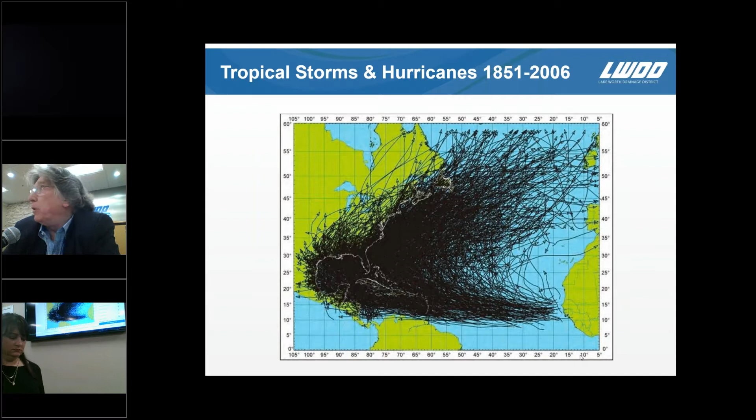The physical development of a hurricane is kind of important to understand. Hurricanes are more complicated than they appear on the radar that we see in our weather reports and on computers, etc. Hurricanes have 4 main parts that make up the physical composition: we have the eye, which is right in the center, you're all familiar with that; the eye wall, which is the band right around the eye; the rain bands that are associated with the larger structure of the system; and then the overlying cloud cover.

As air rushes around, like on a pinwheel or a carousel, not unlike water going down a drain, at the same time it's moving around, the air is moving inward toward the eye of the storm. The winds come in at the bottom, and then at the eye it acts like a chimney, and the air goes up the chimney to the upper troposphere.

That portion of the hurricane is critical to the wind speed. If you've got a well-formed eye, you have a well-formed chimney. And if that air can get into the eye and move up, the system is going to spin faster, and then you're going to have increased winds that we'll talk about in the categorization of these storms. When you have upper level winds that sort of blow the top off the chimney, it's harder for these systems to generate. So whenever you hear the weathermen talk about upper level winds, that has a dampening effect in some cases on a hurricane.

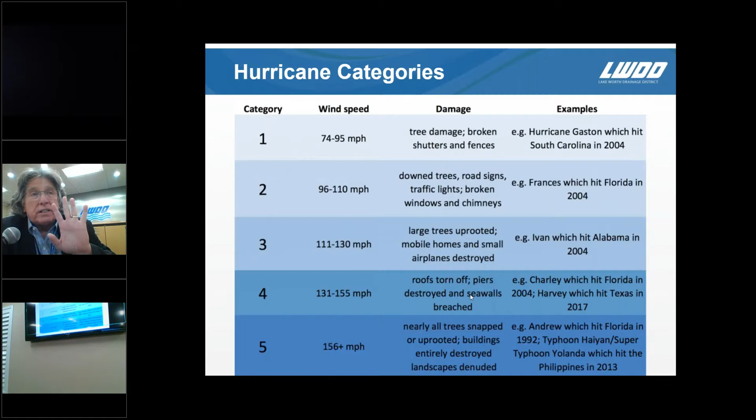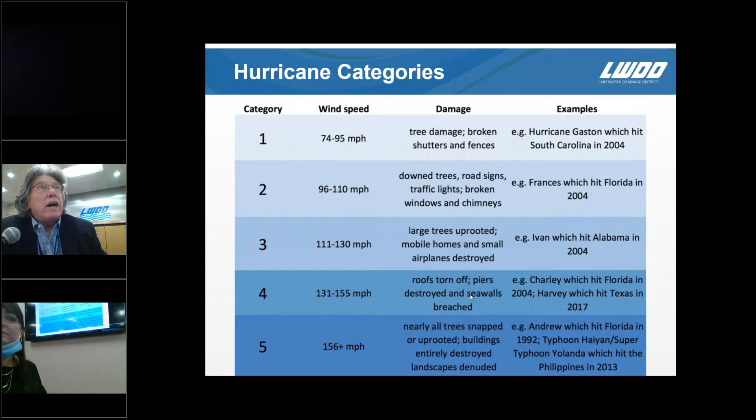But this category really just affects wind speed. There are no categories or identification of severity of rainfall, because you can have a tropical storm that drops excessive amounts of rain because it's slow moving, versus a category 5, which may drop an equivalent amount of rain, but it's moving very fast. So a lot of those factors play into what we deal with as water management.

The 2019 Atlantic hurricane season was a very busy season. There were 18 storms named, 6 were hurricanes, and 3 of those were major hurricanes. Hurricane Dorian impacted the Bahamas, Humberto impacted Bermuda, and Lorenzo impacted the Azores. 6 tropical storms affected the U.S., including Dorian and Barry as hurricanes.

And this is the point I like to make: regardless of the activity of the season that is forecast, we have to pay attention whether it's an active year or inactive year. I'll give you 2 examples of that.

If you remember back in 1992, Hurricane Andrew hit southern Miami-Dade County. Devastating damage occurred from that storm. It was one of 3 storms that formed that year. So the year that we were hit by the worst storm in Florida's history was one of the least active years that we had.

And you've probably seen in recent history where we've had 20, or in 2019, 18 named storms, and really weren't very much affected by those. So regardless of the forecast activity, we really need to pay attention to the hurricane season and realize that we can be hit literally any year.

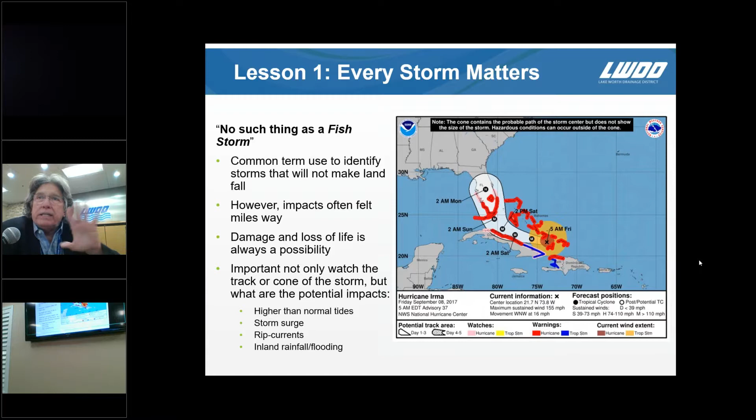In history, we've had storms where the eye of the storm went in at Key West, but the majority of the rain fell in Palm Beach County. So even at great distances, we can still be significantly affected.

Hurricane Dorian was a Cat 5 that killed 70 people in the Bahamas, 60 people on Abaco, and 10 people in Grand Bahama. And the second deadliest storm in 2019 was Lorenzo.

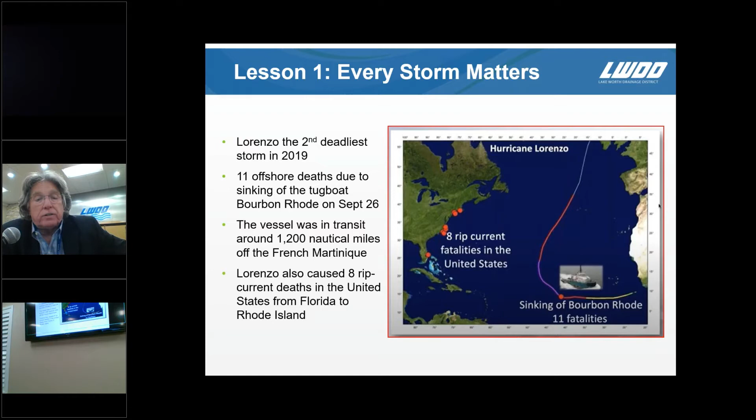It was a Cat 5, and it was one of those storms referred to as a fish storm, but it killed over 19 people. There were 11 offshore deaths due to the sinking of a tugboat that was out in the Atlantic near the Azores. The vessel was about 1,200 miles off of French Martinique. And Lorenzo caused 8 rip current deaths in the United States between Florida and Rhode Island.

It's important not to fixate on any one of those, but to recognize that there's a lot of uncertainty and variability that the professionals, weather forecasters at the National Hurricane Center, are dealing with. They look at each one of these models in great detail. They understand where the models have their strong points, where models may have their weak points, and that factors into their decision as to which model to follow.

Obviously, we don't have that expertise. We rely on the Weather Center to sort through the scores, but it's good to have this information available to us in real time that we can look to and see the uncertainty facing the Hurricane Center forecasters. This is a graph that shows the improvement in forecasts from the 1960s to today.

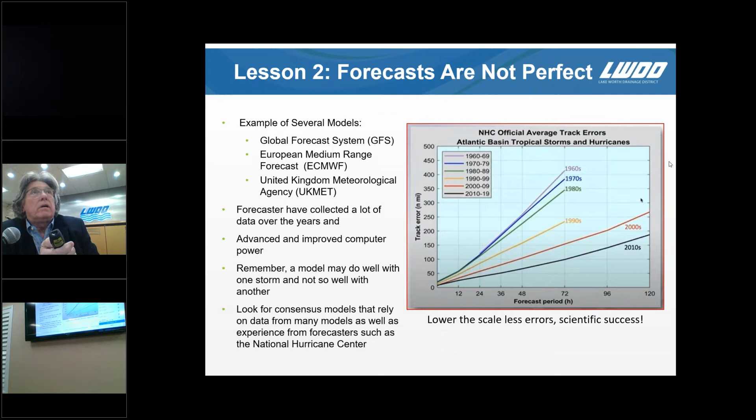Oops. Right, this is not working. Try it now. There we go.

The other thing to point out and understand is that even though hurricanes have an eye, and on a map that's a very fine point, and certainly we're concerned about where that makes landfall or how it affects us, in these forecasts made by the National Hurricane Center, they're showing us this cone of probable impact, which says the eye can be anywhere within this area and still be within the forecast made by the National Hurricane Center.

Hurricanes can cause wind damage far outside of this cone as well, so you're not held harmless if you happen to fall outside of the cone at any one time. We need to stay vigilant, even if our area turns out to be just outside the cone. A small deviation within the cone can significantly change the impacts to the surrounding area. And as we talked about earlier, damage is measured not just by the category, but by the physical size of the storm, the speed of the storm, and when it can make landfall with regard to tides.

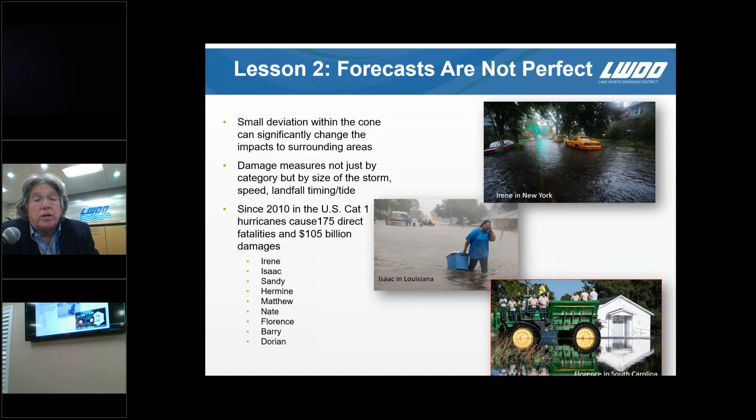Since 2010, U.S. Category 1 hurricanes caused 175 direct fatalities and over $100 billion in damages.

Social science matters. We tend to forget bad experiences, experiences that particularly influence people's future decisions. A lot of times, from past experience, people think well, the hurricane wasn't that bad, the last one that is. And there's a tendency for us to dismiss or diminish the potential risk because we haven't been impacted before.

If we focus on the category too much, we can lure ourselves into a false sense of security - that's only a Category 1. Well, it doesn't mean you're going to avoid flooding damages, and you can still have wind generated damages from trees that fall over in a Category 1. We had a tropical storm a few years ago on our rights of way, and we had 75 trees fall from what was literally the winds from a tropical storm. So we always have to pay attention to these systems, regardless of the strength.

We need to communicate often and use effectively multiple communication platforms, whether they be social media, print, email, or face-to-face, or telephone conversations, or meetings like this. We definitely need to communicate, because every storm presents a different spectrum of risk, and it's good that we're talking and communicating to best understand.

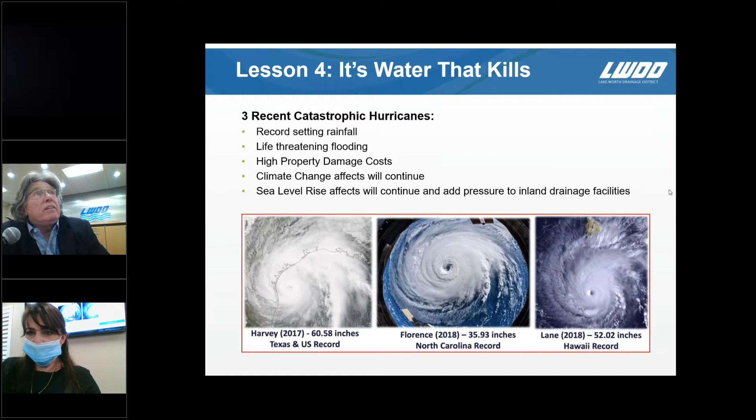Another lesson, it's water that kills - 3 recent catastrophic hurricanes had record-setting rainfall, life-threatening flooding, high property damage, and climate effects will continue to impact us in hurricane seasons, whether through more hurricanes in number, or whether they're just more intense with regard to wind and rainfall. And as sea level rise continues, it adds pressure to inland drainage facilities, both along the coast and well inland. We can get into details about those later.

Oh, there we go. Go ahead. There we go, there we go.

Another lesson is the storm's timeline, and it's the old saying, it's not over till it's over. There are a lot of injuries that occur after the storm has passed, when people are starting to get out and move around. That's particularly true if there are a lot of flooded streets, and we'll talk some more about that in a minute.

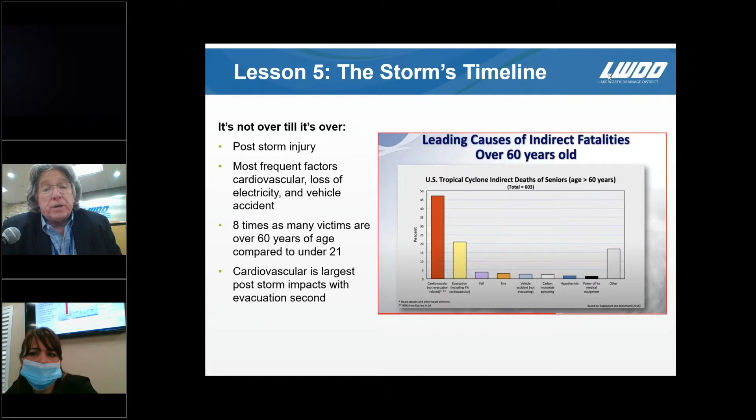The most frequent factors in the loss of life are cardiovascular issues, loss of electricity, or motor vehicle accidents. There are 8 times as many victims over 60 years of age compared to under 21. Cardiovascular deaths are the largest associated with that.

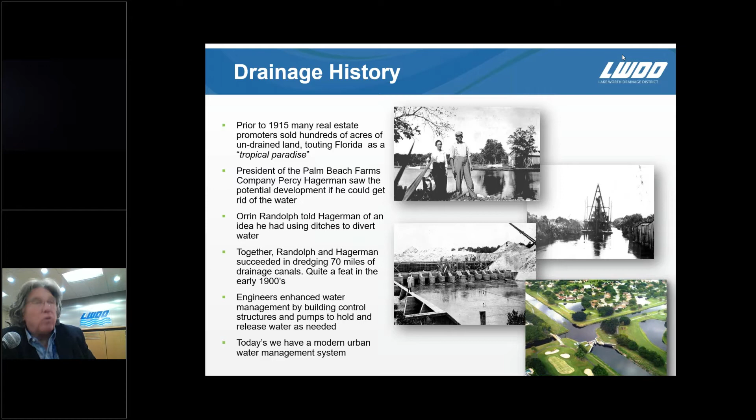One of the biggest changes after the 1915 dredgings was the Clean Water Act of 1972, which put in place federal, state, and local requirements for dealing with stormwater. Prior to that, stormwater discharge was unregulated—you could discharge at any rate, any quality. There were no retention or detention systems like the internal lakes and ponds we see today for stormwater quantity and quality. Flood protection, for the most part, was via swales, ditches, or just local ponding on undeveloped land.

The Clean Water Act, through permitting, regulates the discharge of pollutants into the water from point and non-point sources—whether it's coming out of a pipe or flowing overland, like in the top photograph, from one parcel into another. The Clean Water Act regulates the movement of pollutants through these sources with the goal of ensuring surface water meets standards necessary for human water consumption, sports, and recreation.

It affects the way community systems are designed, because while the purpose of the Clean Water Act is to deal with water quality, they recognized they had to consider flood control in that overall goal. So they integrated flood control aspects into the regulations that address water quality. Since the 1970s, development standards for drainage systems have been regulated to ensure flood protection and water quality, so developments constructed since then meet those standards with very specific requirements for drainage and flood control.

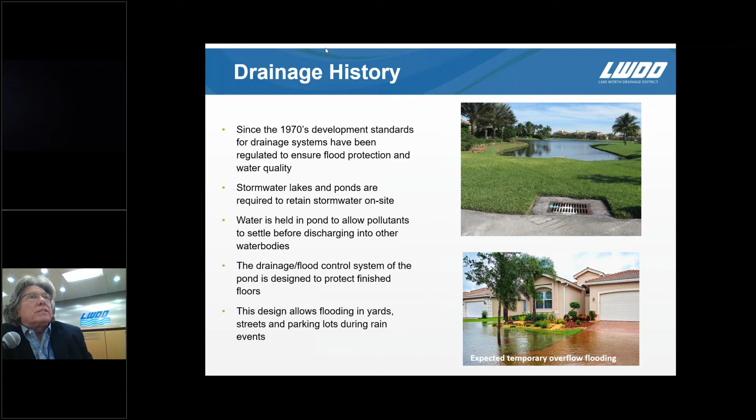As part of that effort, we have a three-tiered system, and each tier has to work well and in coordination with the others in order to function. The South Florida Water Management District manages the regional tier; entities like Lake Worth Drainage District or Palm Beach County generally handle the second tier; and residential communities or businesses are responsible for drainage on their own property. This coordinated effort is needed to ensure stormwater is discharged at the proper rate and time for flood control, while retaining as much water as possible for conservation, water quality, and other environmental reasons.

To compare the system to something similar, our drainage system functions a lot like a roadway system—you have the major interstates, like I-95 or the Turnpike.

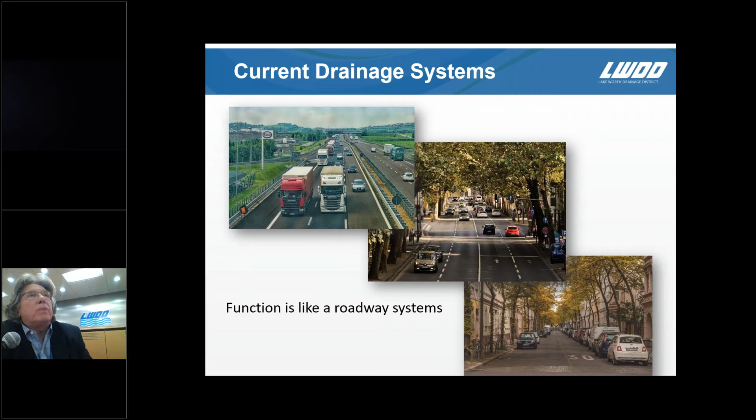They're managed by the state of Florida, and in many cases, like I-95, they're constructed by the federal government. The secondary system is constructed by local entities like Lake Worth Drainage District, Palm Beach County. And then the third part of the system are the local communities where you construct and maintain your internal roadways, and you have similar responsibility for your internal drainage system.

So as I mentioned, Tier 1 is kind of a state-federal partnership to deal with flooding, particularly in South Florida. South Florida Water Management District is one of 5 water management districts statewide. They're a regional governmental agency that manage water resources over the southern part of the state, and it covers 16 counties from Orlando to the Florida Keys with a population of almost 9 million residents.

It operates a complex regional flood control system that has over 2,000 miles of canals and levees, 600 water control structures, hundreds and hundreds of culverts, and over 70 stormwater pumping stations, which is an enormous amount of horsepower when you compare it to other parts of the state or even the country.

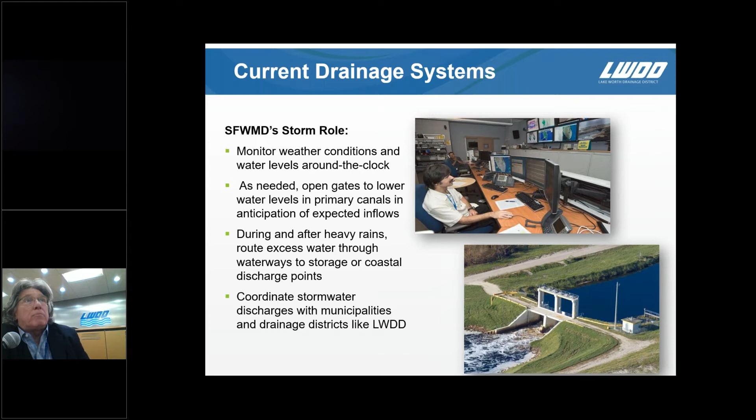During and after heavy rains, they route excess water through waterways to storage or coastal discharge points, and they coordinate stormwater discharges with municipalities and drainage districts like us, Lake Worth Drainage District. I can tell you personally, on a typical heavy rain event, not necessarily hurricanes or tropical storms, but just 6 to 8 inches of rain, I'm generally on the phone with the control room telling them what we are doing and coordinating our operation with theirs. So we operate very, very closely with South Florida Water Management.

The annual non-ad valorem assessment, in other words what taxpayers are assessed, is $49.50 per acre or portion or subdivision thereof. We have a 5-member board of supervisors elected by landowners within our boundary, and they oversee our operations, our budgets, how we do business. We meet once a month to discuss a wide range of topics along those lines.

Our storm role, obviously, we play a very important role in addition to coordinating with South Florida Water Management. Several days out from a projected landfall, Lake Worth Drainage District will be coordinating with other agencies like South Florida Water Management and Palm Beach County Emergency Management. The week before, LWDD will begin a pre-storm check of our system. We stop our normal maintenance operations and send our crews out to look at our water control structures, to make sure they're functional, and to check canals, culverts, or bridge crossings over our canal network to make sure there are no obstructions to the flow.

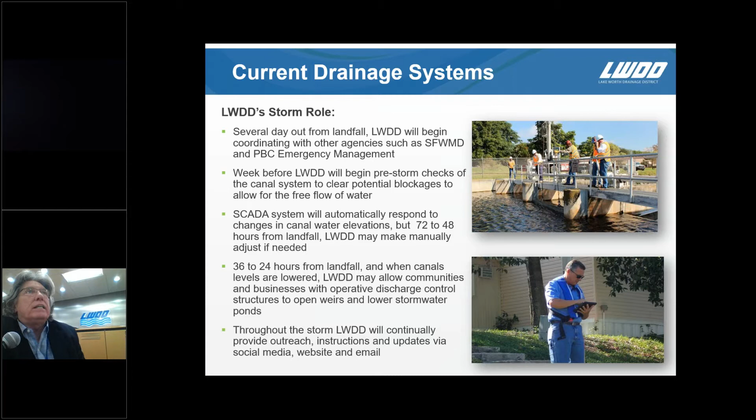And then you close them, and throughout the storm, Lake Worth Drainage District continually monitors, provides outreach, instructions, and updates via social media, via our website, and via direct email. We're here 365 days a year, working to ensure that the flood control system functions when we need it.

It takes a lot of maintenance to make sure a tree isn't going to fall into our canal, or that sediment hasn't built up to obstruct a roadway crossing, bridge, or culvert. That work happens all year long. Depending on the state of a canal, rehabilitation projects may include removal of vegetative encroachments, and removal of structural and non-structural encroachments that may preclude us from reacting in an emergency. Obviously, the dredging of the canal channel is important.

Reshaping or reconstruction of the canal bank is also an important function. These regular maintenance activities are for flood control, and we apply them also to our flood control structures, where we're looking at electrical and mechanical components that need to operate in an emergency.

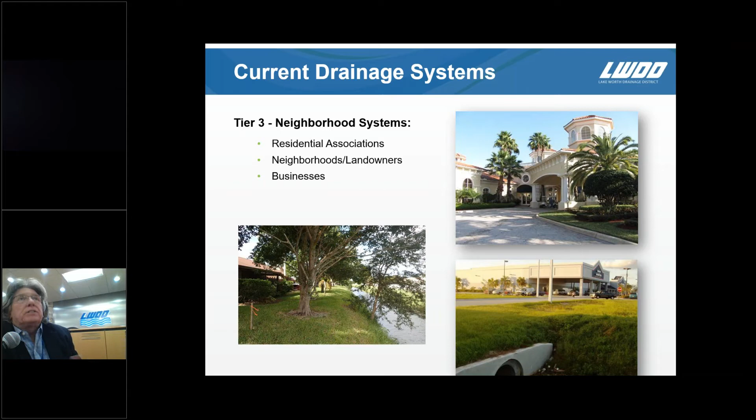Now we talk about Tier 3, the neighborhood system, and this is the system that most of you on the call this morning deal with on a daily basis. They're residential associations, neighborhoods or collectives of landowners, and businesses, depending on the configuration of your particular area. The community's role in dealing with stormwater is just as important as the local Lake Worth Drainage District role and South Florida Water Management District.

Just like your roadway system, you can have a traffic jam because something happened on Interstate 95. You can have a traffic jam because of something that occurred on Southern Boulevard or State Road 7, the second tier of the roadway system. You can also have a traffic jam in your local community because a tree falls over and people can't get out. So all three of those tiers have to function in order to avoid traffic tie-ups, and in a similar fashion, in order to avoid flooding problems.

For the community's role, several days out from landfall, it's important that you monitor the weather for tropical developments, keep track of the forecast. Contact your property manager or drainage committee member to verify who will open the weirs and who will be the contact for us, Lake Worth Drainage District, during the storm. It's also important to know if you've got the keys to locks on gates, to equipment you may need to rake clear an inlet of debris, those types of things, and that you identify the proper people who'll have that responsibility.

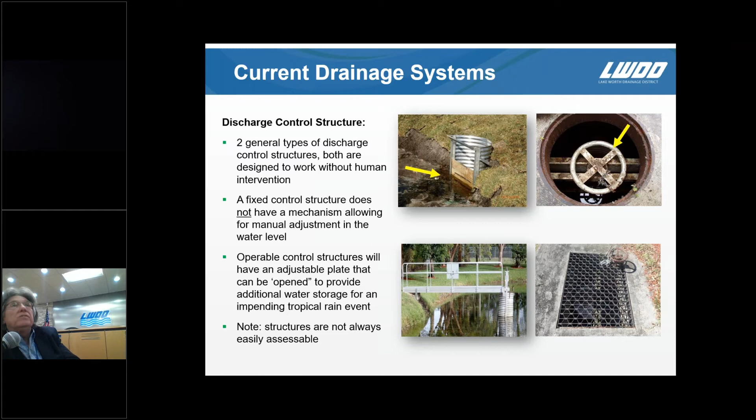It's important to recognize these structures are not always easily accessible, and the picture at the bottom right is an example. There is a wheel there that you can turn and raise it, but if you had to do any maintenance or restorative work, you have to pull that grate off and get down in that concrete box to do that. So they're not always easy to get to.

It's important you know the location of these structures. It's important that you understand to what degree they may be blocked by debris or vegetation due to lack of maintenance, or if some aspect of that structure is broken - a stem broken. If you crank too hard on that wheel, you can break the stem.

And because these are locked to prevent vandalism from opening the gate, who has the key? It may be lost. There may not be a duplicate. The person that has the key went on vacation. A lot of things happen. And all of those that I mentioned actually happened in our history. So you don't want to wait till the last minute to understand the conditions of these local drainage systems.

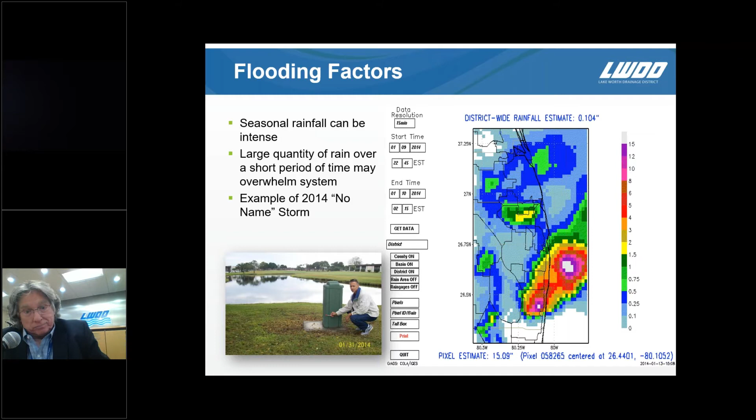A good example of this was what we call a no-name storm that occurred in the winter, during the dry season of 2014. It dropped 22 inches of rain in about 18 hours, so less than 24 hours you had 22 inches of rain, and it centered right on top of, if you're familiar where Kings Point is, literally right on top of that area. It resulted in extreme excessive flooding, and it was totally unforecast. The forecast for that afternoon was 2 inches of rain. So it gives you an example of the variability that forecasters are faced with, and the uncertainty they're faced with, and the possibility, literally at any time, that you could have a major flood.

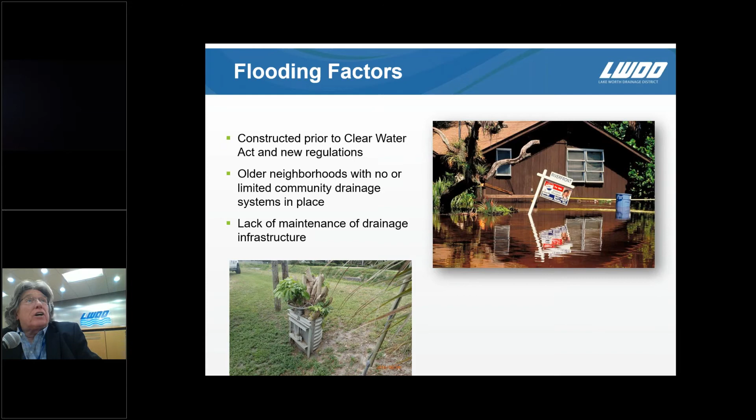The age of a development has a very important role to play. I mentioned the Clean Water Act coming into play in the 1970s, where in an effort to address water quality, it also addressed storm and flood factors. However, anything constructed prior to that didn't have to meet those requirements or thresholds, putting those communities at a higher level of flood risk than communities constructed after implementation of the Clean Water Act. Older neighborhoods may not have the kind of community drainage systems required today, or the degree of stormwater ponds or places for stormwater to go to avoid damage. And if there hasn't been maintenance performed on the drainage system, that further exacerbates things. The picture at the lower left is an example where vegetation got out of control in one structure. They managed to cut the trunks of trees off, but I can promise you that structure can't be operated in that configuration.

Street flooding is something we deal with in South Florida on a regular basis. As I mentioned earlier, streets and open areas are designed to hold some level of water, which to me and you means it's flooded. But there can be things that happen that exacerbate the flooding in the streets, such as drains being clogged. We've got a little video of this to show you.

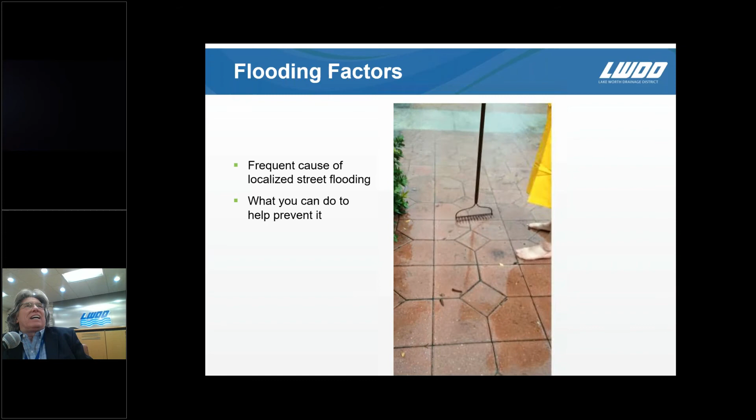This is the high water line right here. You can see the leaf debris right in front of the truck. As you move out, you'll see the water line right now, it is receding. It's hard to see on the cell phone, but right here is the water level. We're going to march out here. I've got my video guy here, he's terrific, his name is David. David's going to film what's going on. This is how deep this is. David's been out here before I came out to see how deep it is. If you go down here, you can see my legs, and my legs are at least a foot deep. Fortunately the rain has just let up a little bit, so we might be able to get this shot in.

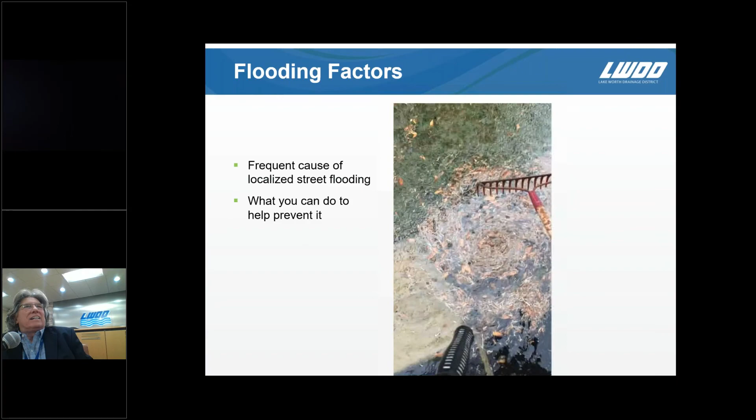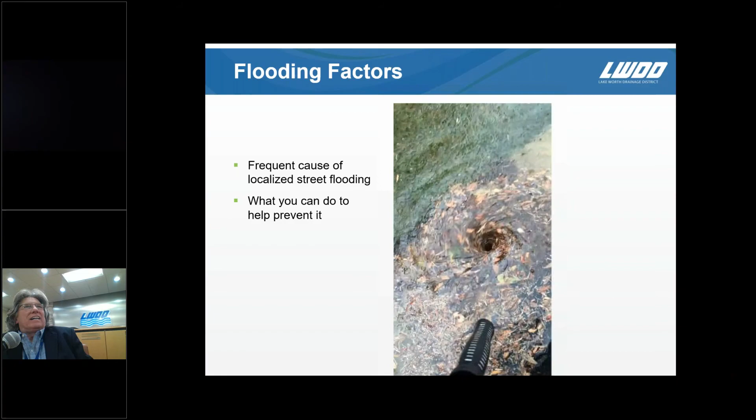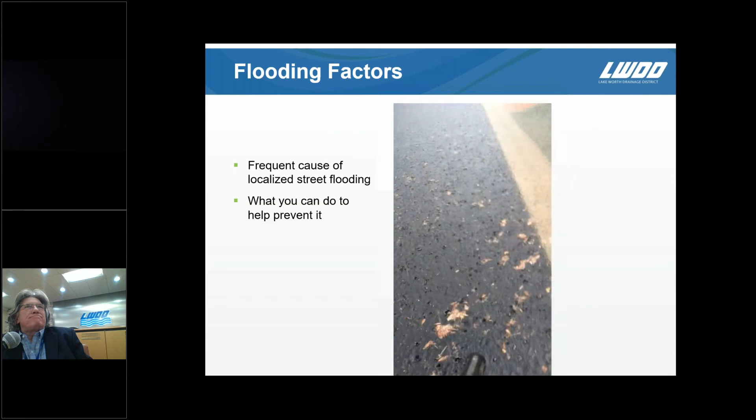Over here, this is a storm drain. It is full of leaf debris. You can see it swirling some, it's denting some. But if we go down and pull up the leaf debris, push more up, even more. This is why you want to keep your area clean of vegetation, keep these inlets clean. Because if you don't, street flooding will occur. Make sure you clean your area and get rid of your leaf material throughout the community.

Rake it, bag it, and get rid of it. Absolutely.

Thank you, that was our former Lake Worth Drainage District engineer, Pat Martin, doing that informational video. He's a great engineer, and it's a good example of some of the simple things that occur that exacerbate flooding. You can imagine he had a lot of little leaves and grass debris, but imagine what would happen if you had a palm frond lay over that inlet. It would totally shut down the ability for it to drain, and you probably wouldn't see it if you drove by.

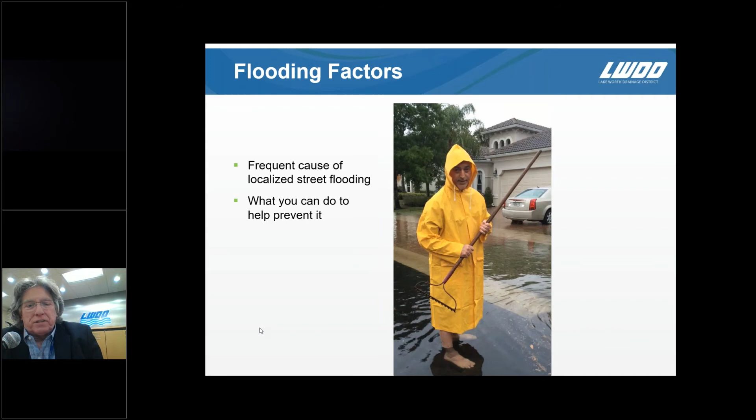So this is an example of things during and after a storm that you can look into to see if you can make the flooding situation any better. So what can you expect with different magnitudes of rainfall?

One of the frustrations I have personally with local weather forecasts is that they don't often tell you how much it's going to rain. They'll say it's a 40% chance, a 20% chance, an 80% chance, but they don't tell you, am I going to expect 4 inches of rain, 8 inches of rain? They're getting better, some of them are starting to do it now.

But that's an important factor, certainly as water managers, and that's why I rely on South Florida Water Management District and the National Weather Service websites, because they have maps that tell you for a given day, 24 or 72-hour period, how much rain you can expect.

So if we were to have, let's say, 5 to 6 inches of rain in a 24-hour period, what would you expect? This picture kind of represents that. You'd expect there to be standing water in yards, swales, ditches, and in streets. The grounds of residential communities should remain dry and passable, but you'd see water edging out into the street. In some communities, you might actually see the crown of the road go underwater.

If 7 to 9 inches of rain is received, in this case over a 72-hour, 3-day period, residential communities, swales, roads, lawns, driveways will be flooded, and it's designed to flood that way for a 72-hour storm. However, there shouldn't be water in the finished floors of homes. You should be dry, and the area up around your home should be dry.

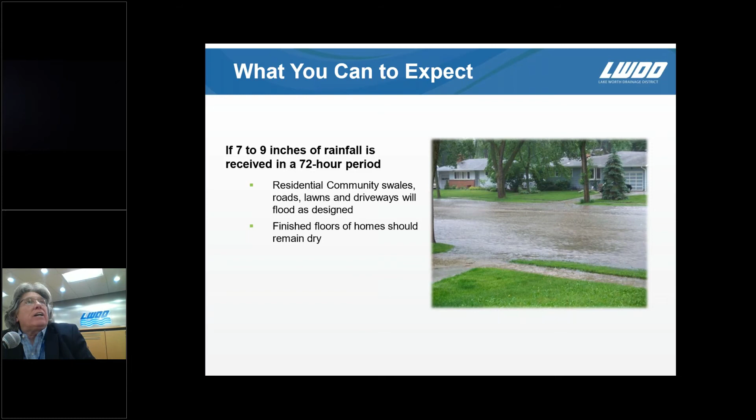It's important for rainfall magnitudes in this area. If you have cars parked down the street, you can pull them into your driveway, because the risk of the car flooding gets higher with more and more rainfall.

If you get 15 to 23 inches of rain in a 3-day period, however, you could expect there to be some areas where houses or businesses may experience flooding of the finished floor. Again, this is excessive rainfall. It exceeds, in many cases, the design of the stormwater systems, but it can occur. As I mentioned, we had 22 inches in 18 hours around Kings Point. There was water in homes during that event, in some of the older areas.

So you have to always be aware that you can have rain events that exceed the design capacity of the storm system, almost regardless of the season.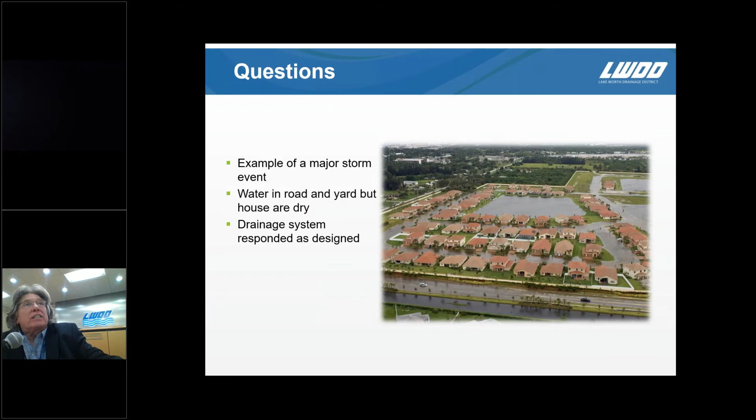Tommy, I don't have exactly a question, but a comment. Okay, maybe you have some input.

Sure. From my Navy experience, I learned that inlet grates or any kind of drain strainer need to be substantially oversized compared to the normal pipe flow or collection volume. That's a really good point. Now, to that point, most developments, certainly all new developments in Palm Beach County, meet the standard, following county standards for roadway drainage design, which are almost always taken from Florida Department of Transportation roadway design features. And just what you described is built into the design of this system.

Again, like the video Patrick had shown, even with some leaves on it, there was still water flowing through it. It wasn't that the system didn't function at all, but it wasn't functioning as well as it could if it were completely clean. But really good point. Those drains should be, and in general cases are, over-designed relative to debris that might clog it. But like I said, all it takes is one pom-pom.

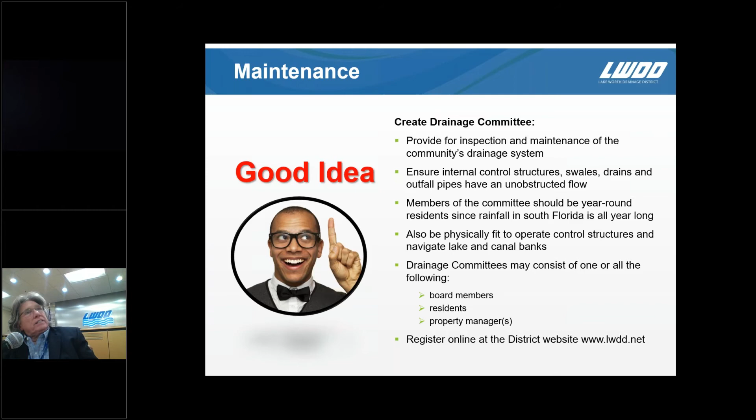Hi, we're the Lake Worth Drainage District. We made this video to show you various types of structures that we have within the Lake Worth Drainage District. If after you watch this video you find yourself unfamiliar with your system, please feel free to call and schedule an appointment. Prior to storm season, we'll be coming out to discuss any questions or concerns you may have regarding your drainage system.

For those communities which have operable structures, we have a dedicated storm line. The number is 561-495-4054. Feel free to call this number anytime you feel your community is threatened by a storm.

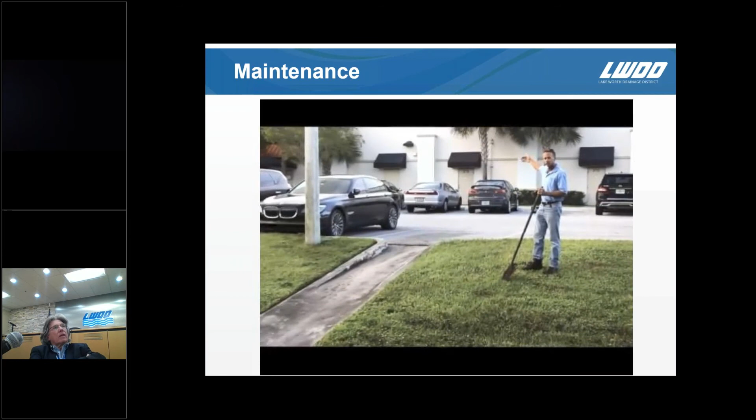Okay, we're at the Publix shopping center at the corner of Woolbright and Jog Road, and this is a retention area. Water comes off the roofs, off the parking lot, through this flow, and into this, what they call a dry retention area. It flows down this swale area towards this control structure.

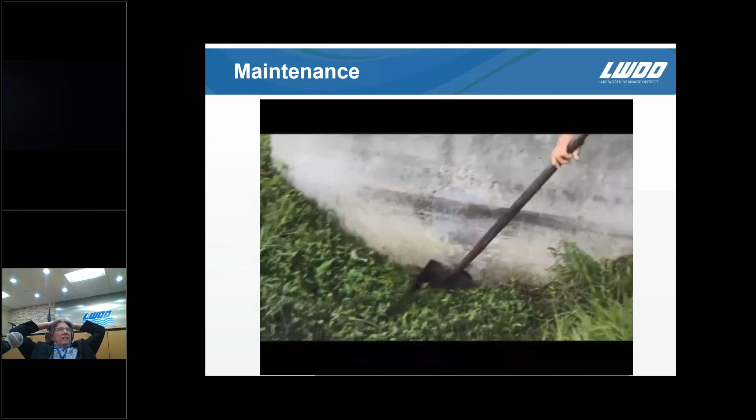This is a control structure that is basically a fixed structure. There's no operation. As you can see, you can't see the hole at all. That's because it's covered up with grass and weeds, a little bit of dirt. That's restricted. The water can't get out as fast as it should. And that's one of the reasons you see this debris on top of the grate.

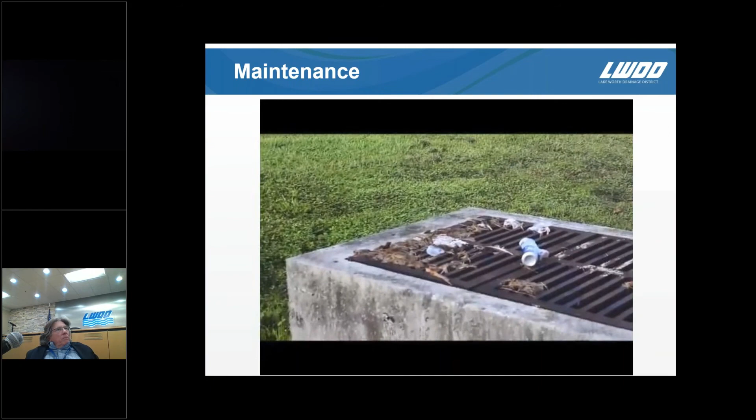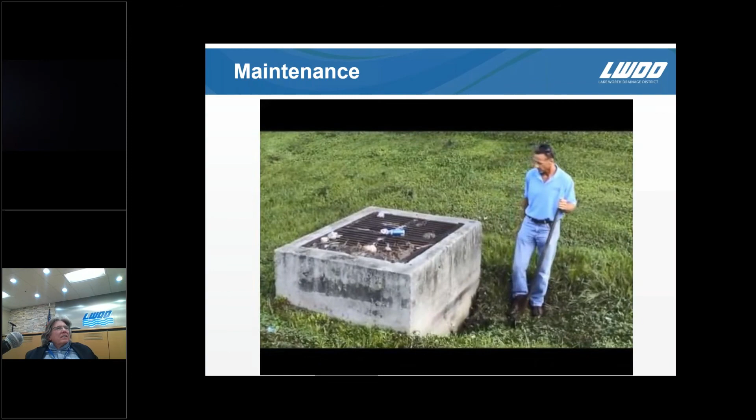The water flowed down towards that bleeder, couldn't get through it, so it built up and went over and through this grate. This type of structure you probably need to check even more often than others, probably once a month. You need to come out here and make sure this is clear, especially before it rains. So, clear, keep this clean, and that's about all you need to do.

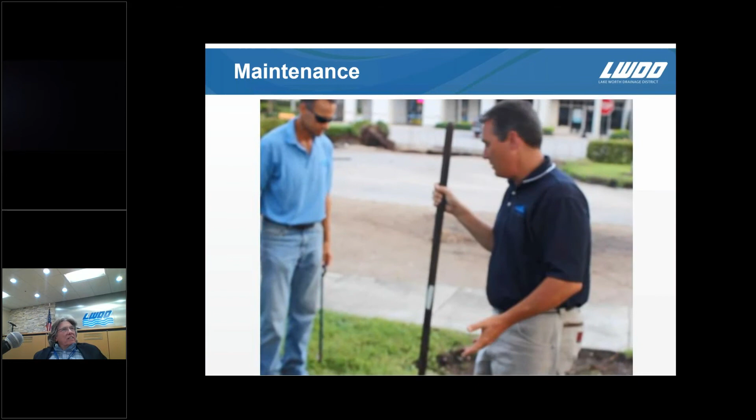Now you can see why it's important to regularly come out and inspect the control structures, because it's really difficult to get this lid off. You'll find in a lot of cases when they need this open, it's in an emergency situation and you're wasting time trying to remove the lid. So maintenance is key.

I got my shovel too. I can grab my shovel too. And... that thing's gonna slip off. All right.

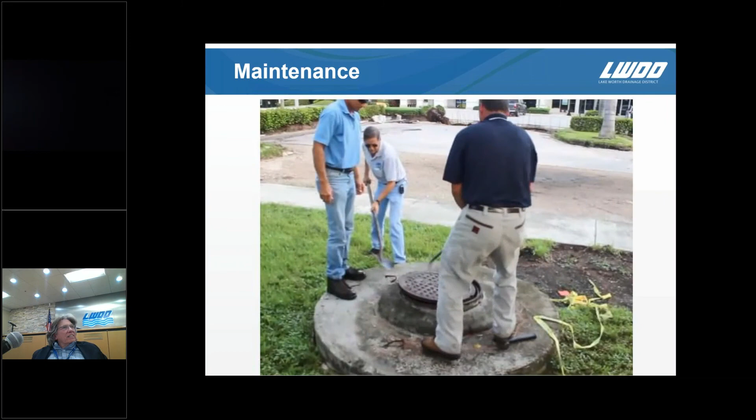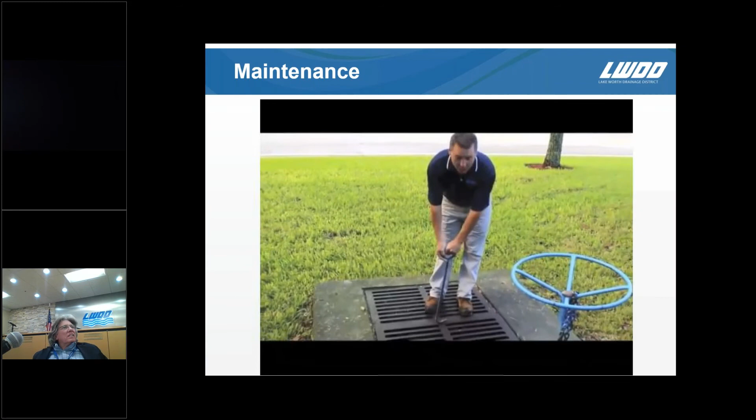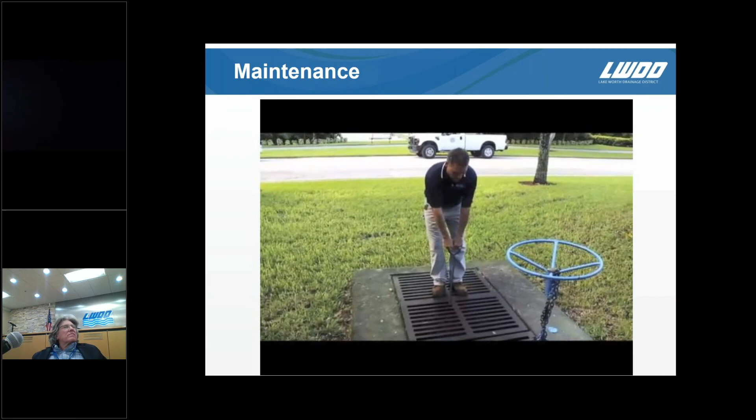This is for informational purposes on maintenance for your weir structure that's installed inside the control structure here. These are going to be very difficult for you to do because they're heavy drain grates on top. You've got to be very careful when you remove these to maintain the bleeder notch that's inside here. You'll find in a lot of cases the bleeder notch will be clogged with debris and not maintained properly. This is your first line of defense against your lake system from flooding. You want a device similar to this to lift up these drain grates, but it's very important that you move them in the proper direction. They are quite heavy, and should they fall down in there, it's not fun to get them out. We've all been there.

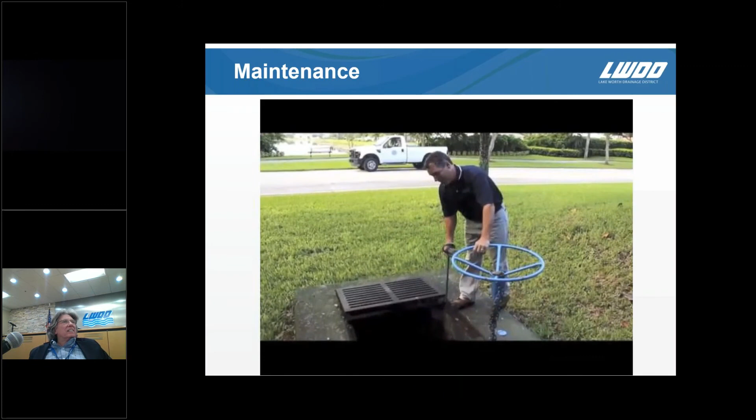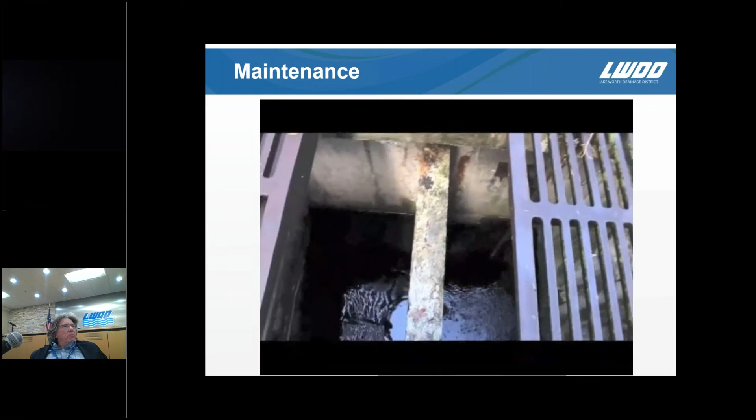So after you remove them, you'll be able to actually look down into your structure. Be very careful not to fall in here because it's rather deep. There's a bleeder notch at this point, and it's actually operating, allowing the water to leave the site and enter into the canal system through a fixed position at the bleeder notch. In most cases, you'll find this bleeder notch will be clogged with debris. Right now it's good and clear, so there's nothing preventing the water from leaving the site. This is a well-maintained structure. There's nothing blocking it at this point.

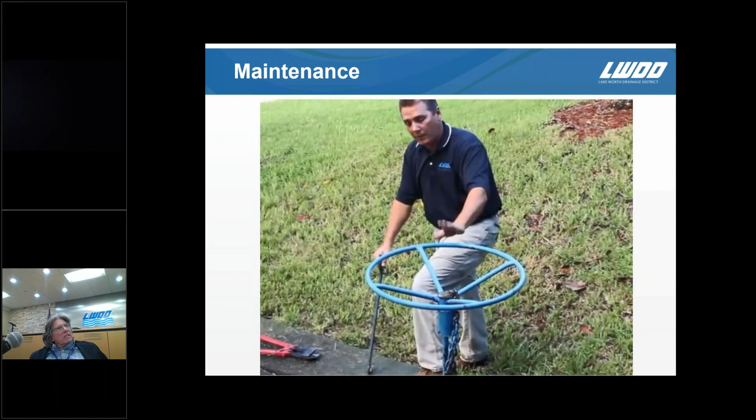We've already removed the grate and made sure the bleeder notch is clear, but another very important item to consider is a maintenance program for the operation of the butterfly valve inside the control structure. This is utilized during emergency release to allow floodwaters to go to the canal system at an unregulated, or faster, rate. You'll notice the community is required to keep it locked.

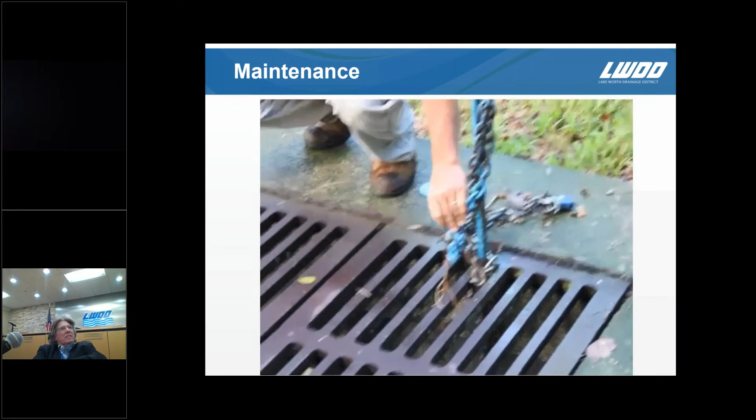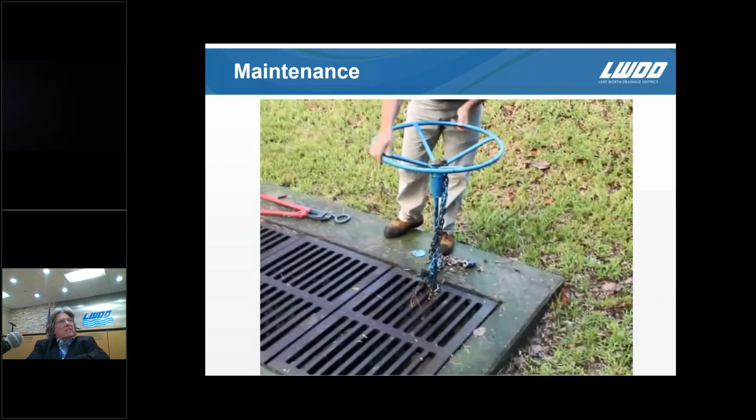They have a key on site, whether it be the property managers or somebody with the board of supervisors for the community. During times of flood events, with the authorization of the Lake Worth Drainage District, they're allowed to unlock this chain and utilize this butterfly valve, opening it so they can allow for the discharge of water at a faster rate if they're experiencing flooding conditions. Again, it's with the authorization of the Lake Worth Drainage District.

During emergency situations, you'll find yourself scrambling for the key or something like that. Nothing's working. You have a pair of these - this is what we call a master key. Have that handy and readily available. At least at that point you can always replace the lock at a later juncture.

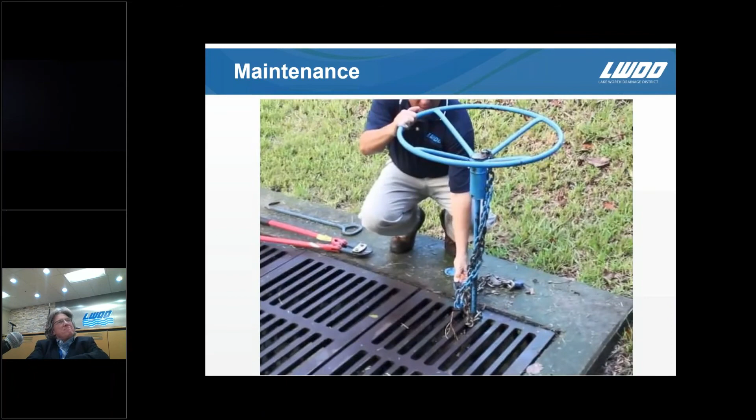Back to the maintenance aspect of it, you're going to want to enter into some sort of program with your maintenance providers - discuss quarterly inspections, maybe four times a year, once a month, or a couple times a year, definitely prior to storm season. You want to come out here and exercise this structure to make sure the valve is working as it's intended to do so. Feel free to call on our inspector if you want to come out, and we can go over the motions with you to make sure everything's operating as intended. We can give you that advice.

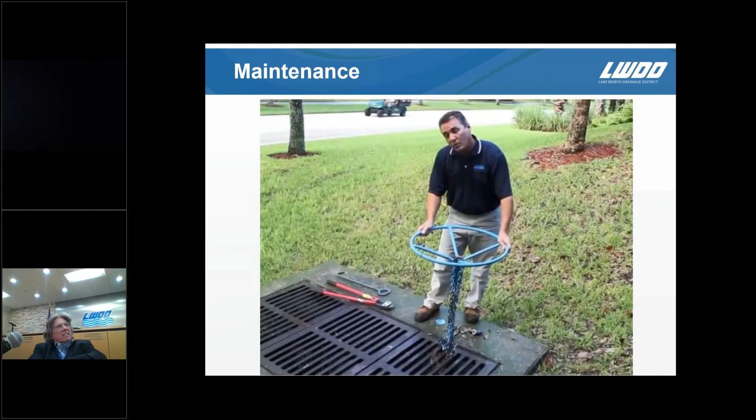Another thing to keep in mind when exercising this gate is not to over-tighten it or over-close it, because you can actually break the threading or break the sleeve that runs this. We're finding that sometimes could be the case. So if it's really difficult for you to operate, there's more than likely a problem.

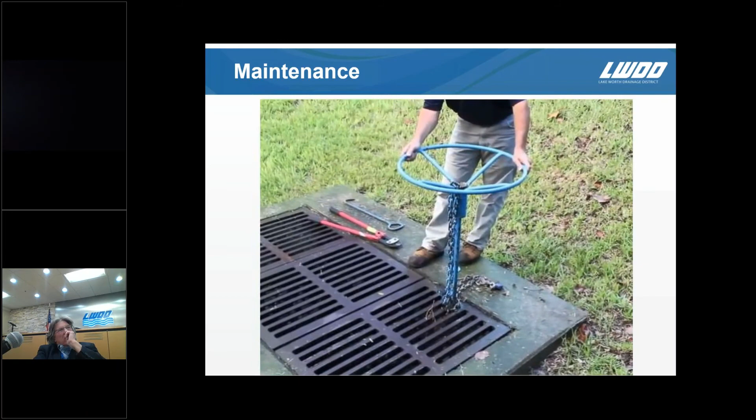Okay, we're going to take you through a scenario now - we're in storm mode, actually having a flooding event. One of the most critical things for you to determine is whether or not your water is higher than the canal water. Obviously, if the canal water is higher and you open up the operable weir, what you will do is flood your property at a faster rate, which you do not want. So the first most critical thing for you to do is determine whether or not you have positive outfall to our system - meaning your water is higher than the canal water itself. Without positive outfall, it could negatively impact you.

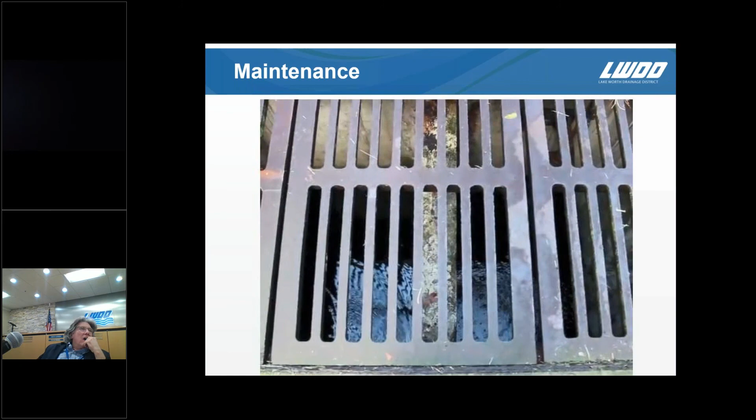Once you have determined that you have positive outfall, and you have the authorization from the Lake Worth Drainage District to open the emergency structure, at that point that would be recommended.

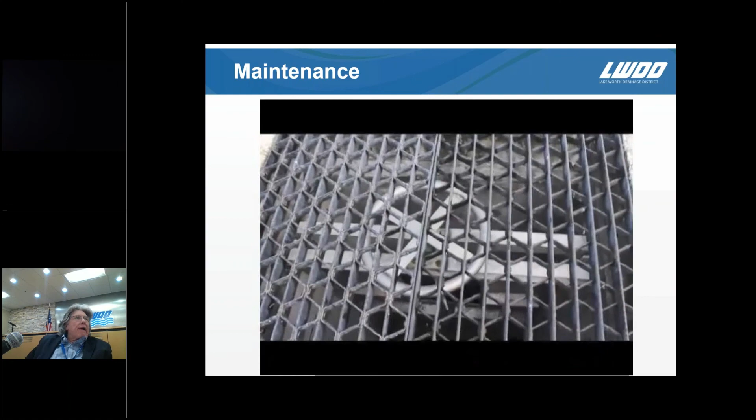It's called a screw gate. In this case, the operating mechanism is below the grate, so you have no option but to remove the grate. So once again, as Doug mentioned before you do anything, make sure you have positive outfall, meaning that the water on the lake side of the weir is higher than the water on the canal side of the weir. If it's not, don't do anything more. Just leave the positive outfall.

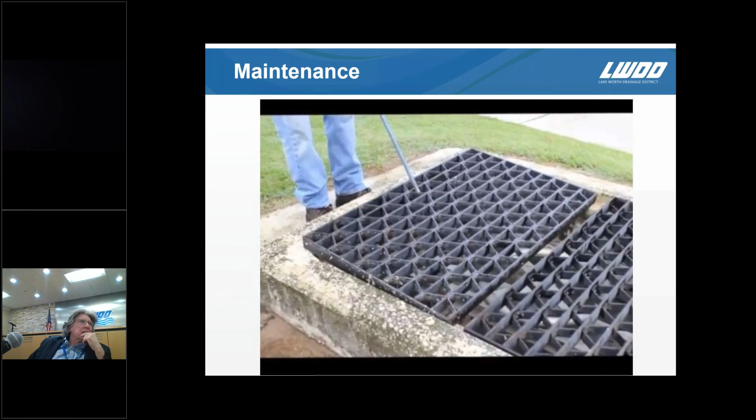Once again, here we have to remove a grate to even get to the operating mechanism. Check and make sure you're sliding it along the supports. In most cases, you can only slide it one way, because if you slide it the other way, it's going to fall down into the control structure. Lift up, slide it along the supports. As you can see right now, there's a little water coming through the bleeder, and once again, this bleeder appears to be in good shape, not clogged. But to reiterate what Doug said, it's always important to make sure your bleeder stays clear.

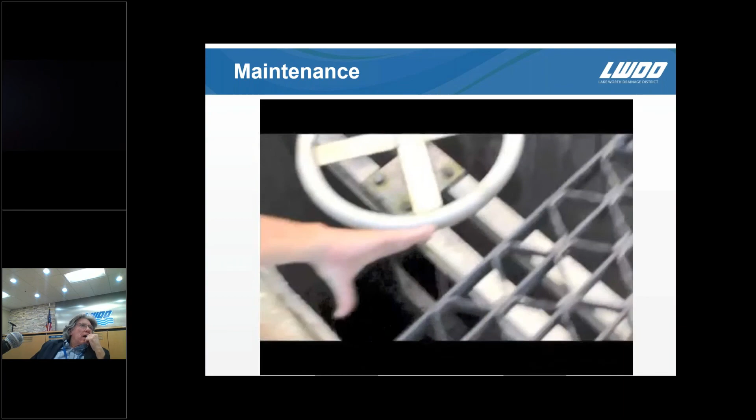We can show you there's some staff gauges installed inside this control structure. You'll notice it gives you some elevational readings, which is critical. Sometimes we need to know what your water is at, and you can report back to us. We're experiencing 16.50 water on the upstream side, and downstream we're right at elevation 16. So you're seeing there's going to be 6 inches of difference in elevation. That'll also help you determine whether or not you have positive outfall. The higher the number, obviously the higher the elevation, and the lower you can tell the water's flowing down.

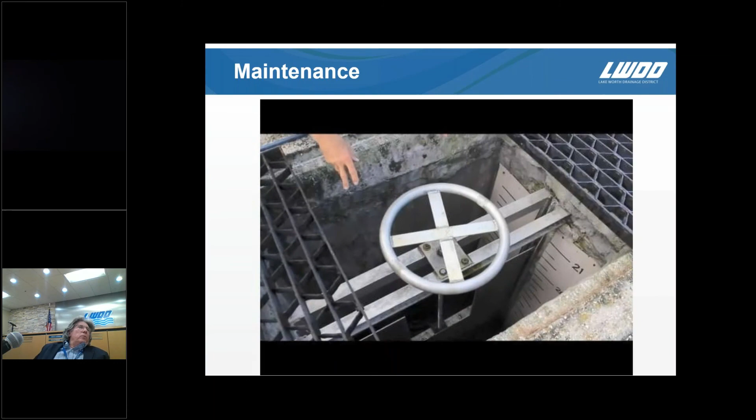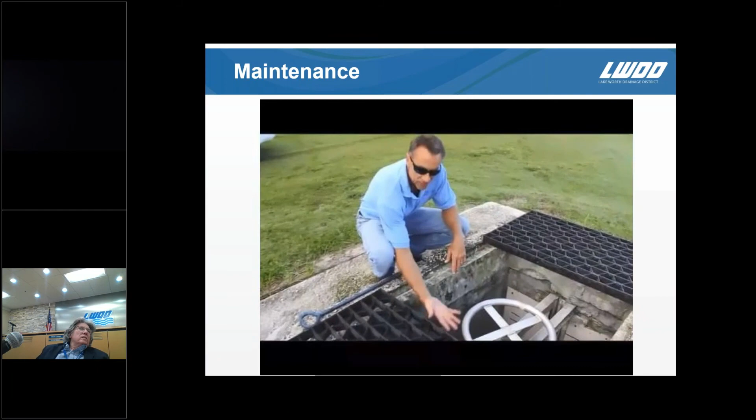In this case, similar in nature, the entire gate is going to come up. In the previous instance, it was just a butterfly valve located within a concrete wall, so you're not going to see anything other than additional turbulence in the structure as you open the butterfly valve. This one, you can actually see the gate rising, and as it rises, the water goes underneath the slide gate at a faster rate, allowing your lakes to drain quickly.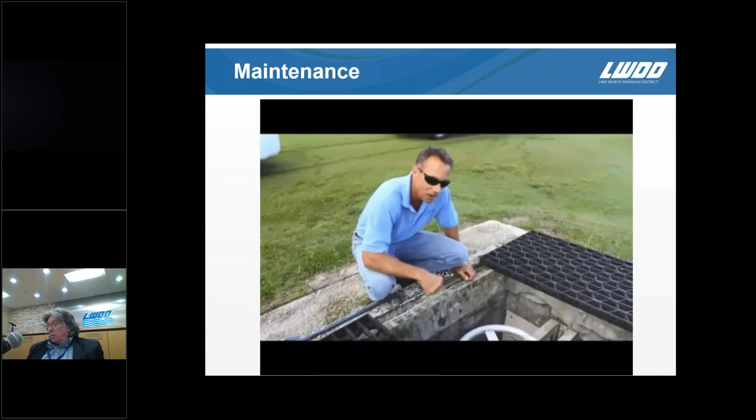Generally speaking, the thing everybody remembers: lefty loosey, righty tighty. Turn it to the left to open, turn to the right to close. And I have to say that is in most cases. I have found a couple cases where it is the exact opposite, where you have a rising stem, but that's very, very rare. In most cases, it's going to be lefty loosey, righty tighty.

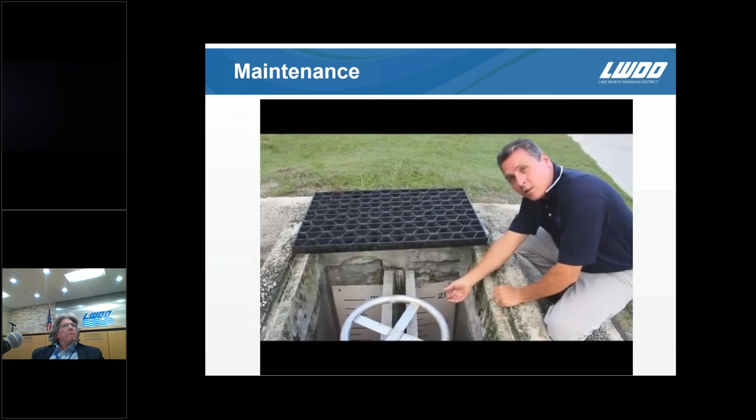And now I'm back to the closed position. Remember what we discussed, you don't want to over-tighten it, because you can do damage to the nylon bushing that actually serves on the stem that lifts it up. It's just a threaded stem with a threaded bushing. If you put too much pressure on it, it'll strip it, and once you strip it, the damage is done. You'll have to do some repairs to the structure, which obviously will be costly.

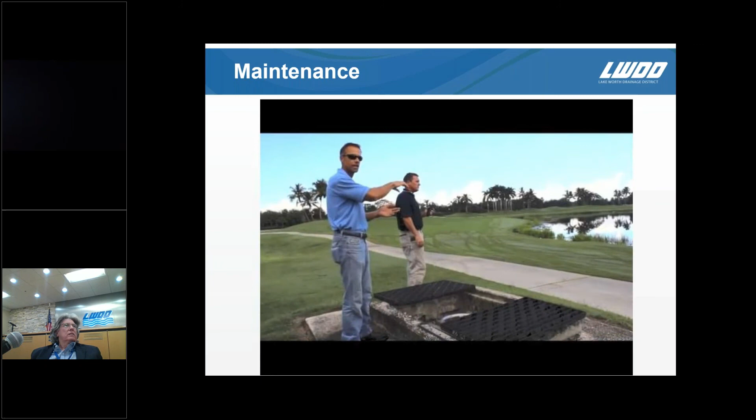One other important note is you can see the lake here is tied directly to the control structure. This community subdivision has several lakes, and not every lake has a direct tie to our canal system. So it's very important to ensure that the interconnects, the pipes that connect lake to lake to lake, that eventually gets to the lake that goes to our canal, are kept clear and free flowing. Because if they're not, then some internal lake that is not connected to a lake that's connected to the control structure will flood, and the people around that particular lake will flood. So keeping those internal pipes clean is very important.

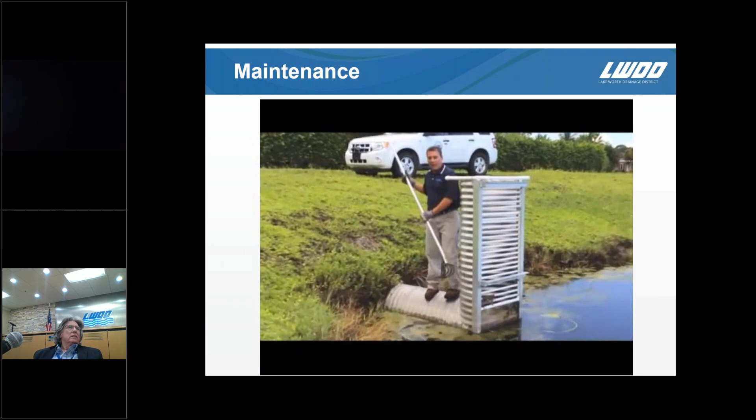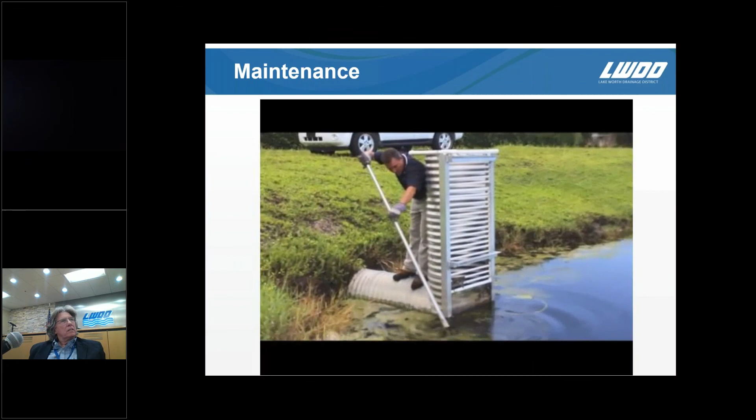This is an example of a flashboard riser, and the reason why they call them flashboard risers is because down here in the water you'll see there's a board. The most important thing you need to do with these flashboard risers is to keep them maintained from any debris getting in front of them, because the water needs to flow during storm events. I have an industrial type potato rake that gets the material out from in front of it, and you'll see as I'm cleaning it, there's something in front of it here that I'll just pull out and move.

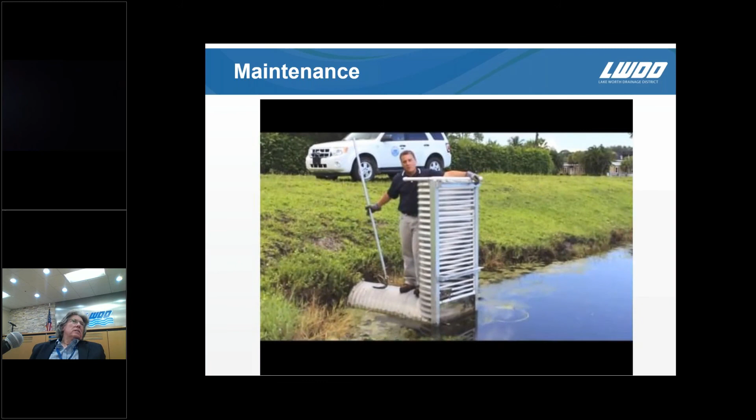You'll also notice that the structure's been retrofitted with these PVC grates. The reason they're here is because it appears that there may be some carp kept within this lake system for vegetation control, as opposed to using chemicals to treat the aquatic weed vegetation.

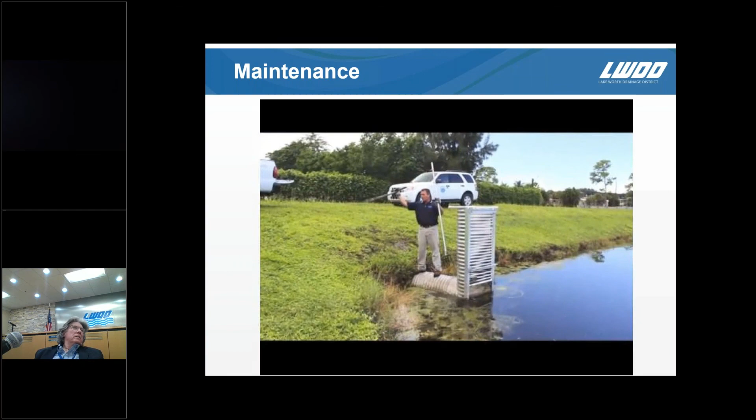They're required by permit to have those in place to keep the carp from leaving the site. Here's a good example of some debris in front of the control structure that could render it clogged during times of heavy storm events.

During storm events, the water may actually be up into this area here, so it's going to be very difficult for your maintenance personnel to come out and take care of the situation at hand, should there be some clogging in front of this.

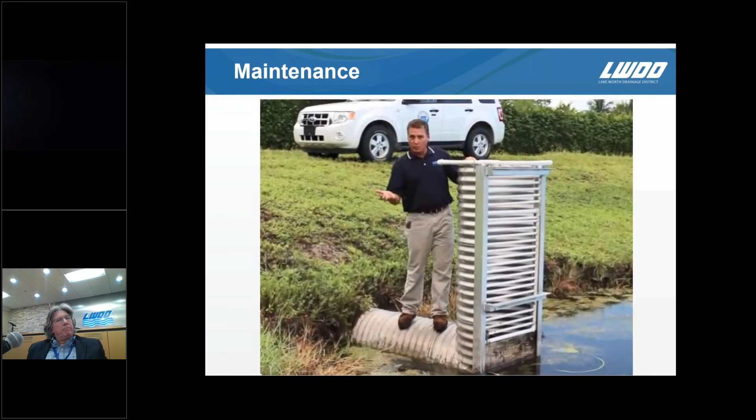So what you want to do is, prior to the storm event, come out, give a visual inspection, clean any debris that's in front of it, and continue to monitor it through the storm event. Obviously, if it's a serious storm with a hurricane, you don't want to have your personnel out here. Let the system do what it needs to do.

Seek shelter, make sure you're in a safe location, and then after the storm goes away and begins to subside, come back out, reevaluate, re-inspect the structure, make sure there's no debris in front of it, and continue on with your daily operations.

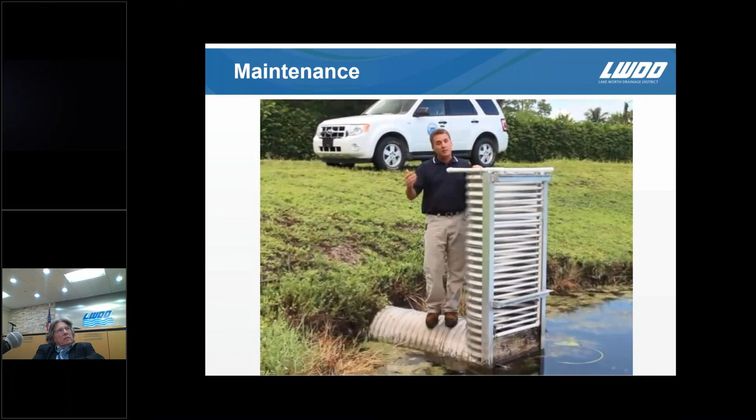In a community that has a more standard 60 to 80 foot road right of way, sidewalk, road, and a swale system to collect the water off the lots and the road, it drains into the swale, and into this catch basin, which collects water and takes it to the lake.

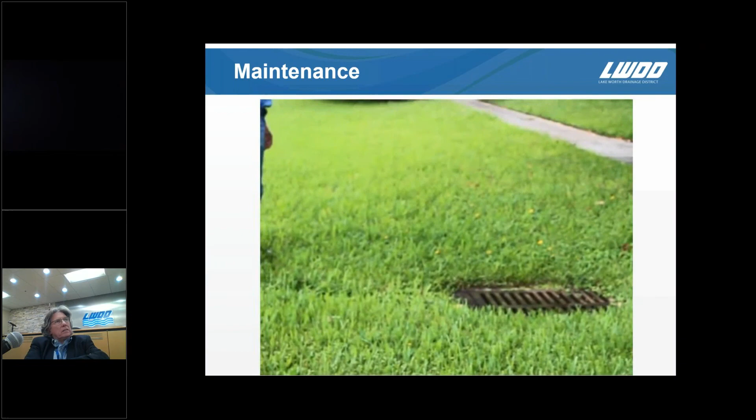As you can see, this swale is in pretty good shape, except for that large planting right in the middle of the swale. That significantly obstructs the flow as it comes down the swale to this basin, and it is going to slow down the flow.

It causes a flooding issue, and it's not an ideal situation to have in your swales if your roads are set up this way.

One more thing, these catch basins can sometimes get clogged with debris, whether it be grass clippings, leaves, sticks, anything of that nature. If these grates get covered up with debris, the obvious thing is they won't accept the water and your streets and homes will flood. So it's very important that these grates remain clean of all debris.

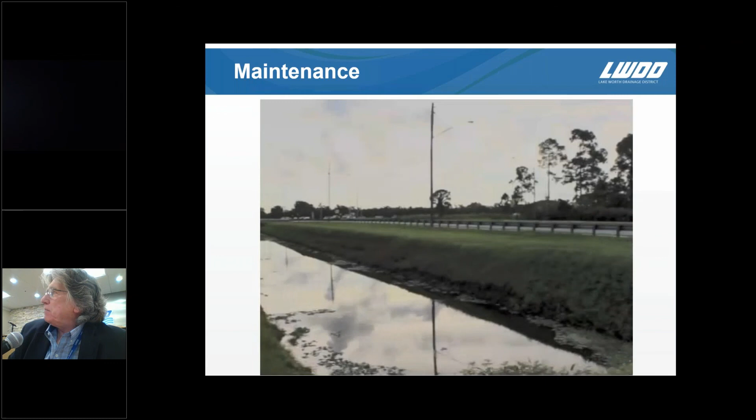Yeah, great. Okay, that was really good. I enjoy watching that video every time.

Me too. But those three gentlemen, by the way, are our field inspectors. And what you saw there is kind of what they do on a day-to-day basis, patrolling their respective geographic areas and looking for particular problems that may jump out.

As you saw, it's not easy to open up and look at those structures to see if they need any kind of maintenance. We don't perform that as a typical duty, but if you have problems, you can call us and we can get one of our inspectors out there to help you walk through it so you can find the best way to open your structure and deal with it.

During a hurricane, we encourage you to report flooding issues on our website. You can email us at EOC, that stands for Emergency Operations Center, at LWDD.net. You can call our main office phone number and they'll work you through a series of prompts, press the number, and you'll get to our emergency line.

A lot of times in a major event, everybody is either in the event or they're on the phone, so you may not get a live person. But I promise you what will happen is we'll get the voice recording that you would leave for us, and in some cases, it's transcribed into an email.